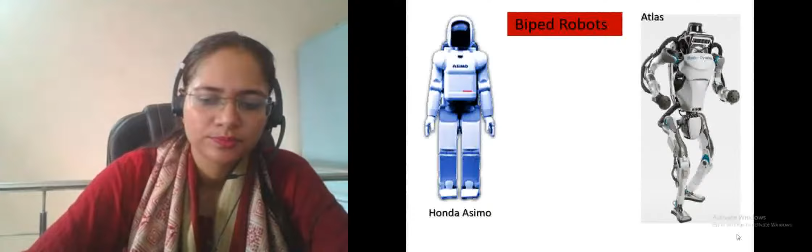These are some examples of biped robots. I think everyone is well aware of these two examples. Before going further, let me show you a video.

So there are many types of robots, but in this lecture we are going to talk about biped robots. What is the need of a biped robot? In this video, if there is any obstacle or stair in between the path of this robot, it cannot take a step over that obstacle, and it cannot go on the stairs. So biped robots are very beneficial for us.

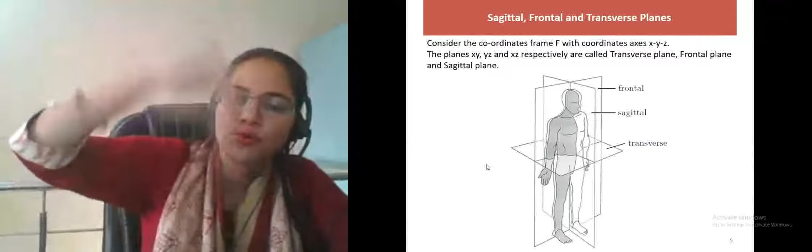If you see the front view of a body and back view of a body, that is the frontal plane. The frontal plane is the plane perpendicular to the sagittal plane, and it divides the body into front and back portions. So this is your frontal plane.

To plan the walk of a biped robot, you should know the sagittal, frontal, and transverse planes, because you have to plan the motion. If you are walking on straight ground, then there may be no need of motion in the transverse plane.

There may be no need of motion in the frontal plane for any part of your body. So if you know what the sagittal plane, frontal plane, and transverse plane are, you can easily plan the motion with fewer degrees of freedom.

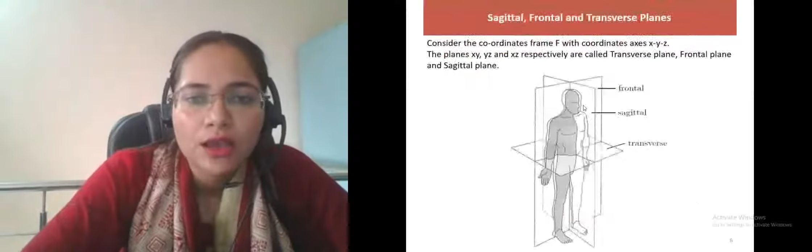The sagittal plane divides the body into left and right sections. The frontal plane divides the body into front and back portions. The plane perpendicular to both the sagittal and frontal plane is the transverse plane. So it is totally clear from this figure what is frontal plane, what is sagittal plane, and what is transverse plane.

Before discussing what is walk and what I have done during my research, let me show you one video. This is the Honda robot.

I think humans walk in a more energy efficient way. In my research, I try to follow the walk of a human with minimum degrees of freedom to achieve a good walk, with minimum energy consumption. So I'm again showing you this video. You can easily observe that this robot is walking with bent knee.

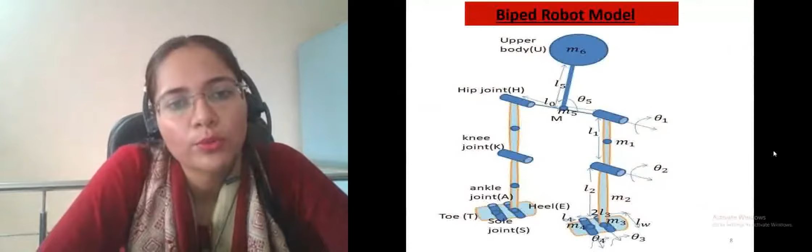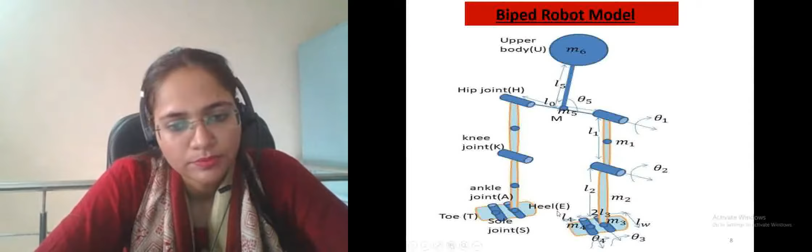This is my biped robot model. The whole mass of the upper body we consider as one upper body mass, M6. We consider less degrees of freedom to plan the walk. After planning, we can increase the degrees of freedom. There is one hip joint, knee joint, ankle joint, toe joint, sole joint, and heel. This is the plan, how we plan the motion of this biped robot model.

This blue one is the swing leg, which is moving forward, and this red one is the stable leg. When we walk, one leg is a stable leg and the second leg is the swing leg, or you can name them as you wish. One leg is fixed on the ground, which is straight, and the other leg is moving from backward to forward. Here the red leg is fixed, which we call the stable leg, and the blue leg is moving forward.

First we bend our sole, then we bend our toe. Similarly, in the stable foot, first we touch with our heel, then by sole, then by toe. Then when our stable foot is flat, we take a step further, with our swing leg heel touching the ground.

The upper body is also moving; the lower body moves in the sagittal plane and the upper body moves in the frontal plane. There should be some frontal plane motion of the upper body to achieve stable motion, because in other robots stability is not a big issue, but in human walk stability is a very big issue.

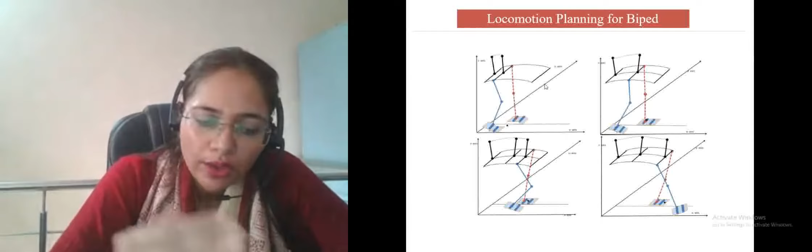That's why humans learn walking in about 1.5 years, or maybe 1 year. It takes a long time because it's difficult to achieve a stable walk, as we have to walk on two legs. There's no four legs or three legs. With four legs or three legs, there's already balance there. But with two legs, we also have to think about stability, as we can fall down.

Before discussing what I have planned and other things, let me first discuss some basic terms which are very useful for you to understand this motion. The first basic term is single support and double support phase.

At a particular instant, one or both legs can be in contact with the ground. We name the leg which is in contact with the ground as the stable leg, and the other leg which is in the air or leaving the ground as the swing leg. So the whole walking is divided into two phases: single support phase and double support phase.

I'm not talking about running. In running, there is a possibility that both legs are not on the ground. But when we are walking, one leg is always, maybe just a little bit, but always in contact with the ground. So when one leg is in contact with the ground and the second one is in the air, it is called single support phase. And when both feet are touching the ground, it is called double support phase. So if one foot is on the ground and the second one is in the air, it's single support phase.

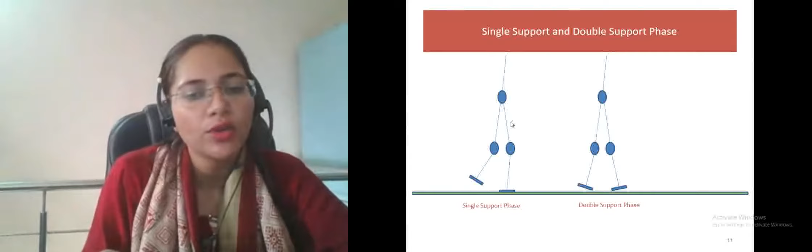If both feet are touching the ground, even if just a little bit, this is called the double support phase.

A single cycle of walking can be divided into two phases: single support phase and double support phase. Single support phase is when only one foot is in contact with the ground, and double support phase is when both feet are in contact with the ground.

So I think single support phase and double support phase is clear to all.

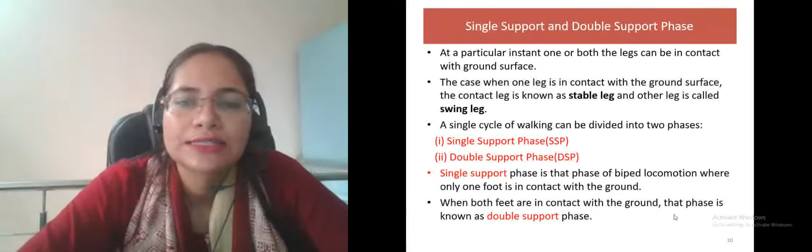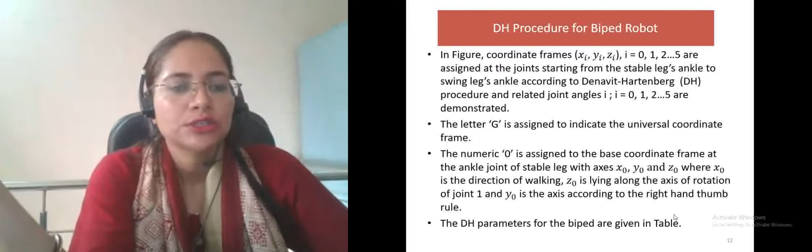Now I'm going to discuss the DH procedure for biped robots. For getting the structure of the biped robot, to plan the kinematics and dynamics, forward and inverse kinematics, you should know the DH procedure for your biped robot. You have to map frames according to DH procedure and assign the frame to find the DH parameters.

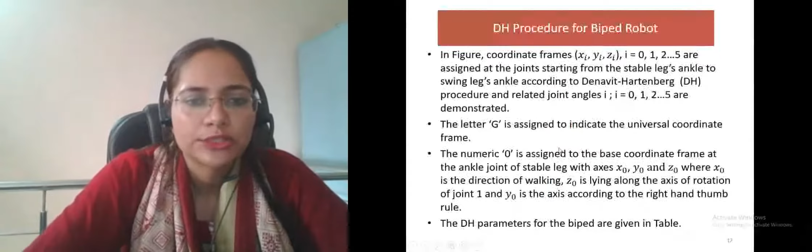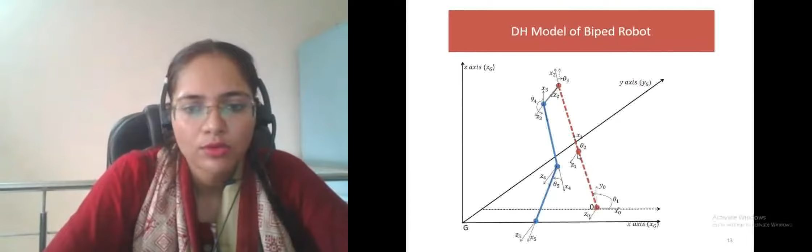In this figure, I have assigned one base frame on this zero link, a second frame on the first link, then on the second link, third, fourth, fifth. So I place the coordinate frame. According to DH procedure, we can easily calculate the joint angle, the twist angle, link length, and joint length. By using the DH procedure, I have placed these frames on the joints of my robot, and here is the DH parameters table for this robot model.

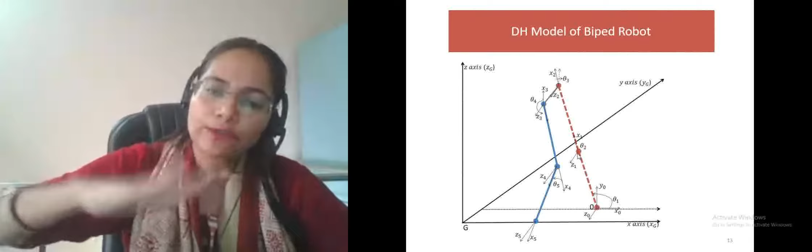In this model, I have only taken the flat footed robot, with no motion. I only consider the flat footed robot here. In further slides, I will consider the moving foot robot also, but for avoiding difficulties, first I only consider the flat footed biped robot model.

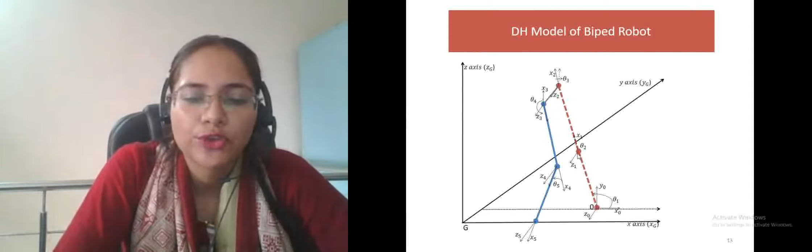After calculating these DH parameters, we can calculate the homogeneous coordinate transformation matrix using these parameters. The first link parameters are used in the homogeneous coordinate transformation matrix, and we get a matrix A0 to 1. Then we use the second link's theta 2, 0, L2, 0 coordinates, and again we get a matrix. In a similar manner, as there are 5 links, we get 5 matrices.

So all these DH parameters we got from the DH procedure, and then using these parameters in the homogeneous transformation matrix, we got these coordinate transformation matrices. Only with the help of these homogeneous coordinate transformation matrices can we calculate the kinematics and dynamics of the robot, because they are the matrix representation of a link or joint.

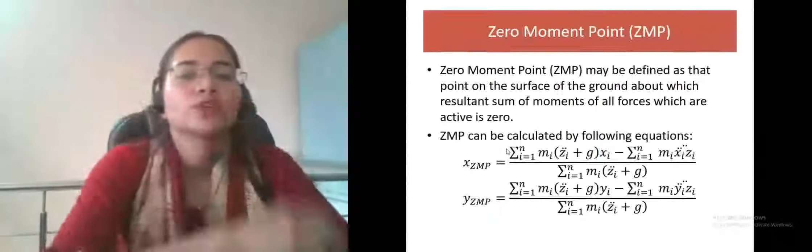So this is our second point. Now, as I already told you, in humans stability is most important. Your walk should be controlled, but first it should be stable. So from a stability point of view, I'm introducing here the zero moment point.

Zero moment point is defined as a point on the ground about which the resultant sum of moments of all active forces is zero. We calculate the zero moment point to assure the stability of the biped robot, and it can be calculated using the following equation. On the ground there are X and Y directions, like sagittal, so we can calculate XZMP using this formula and YZMP using this formula, where these represent the number of links.

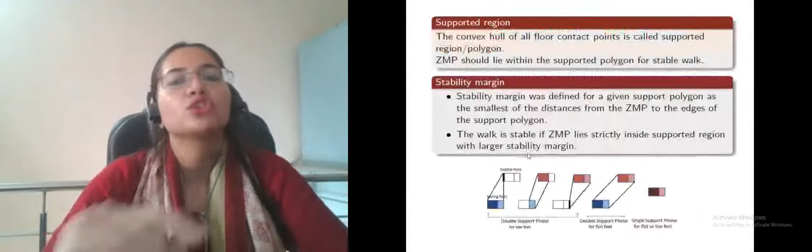So as we discussed the zero moment point, what is its use, and when can our robot be stable? We know the zero moment point is some point, but how does it relate to stability? Your robot can be stable if the zero moment point is in the supported region with maximum stability margin, then your robot can work stably.

So what is the supported region? The convex hull of all floor contact points is called the supported region or polygon, and the ZMP should lie within the supported polygon for stable operation.

What is stability margin? Stability margin was defined for a given supported polygon as the smallest of the distances from the ZMP to the edges of the supported polygon.

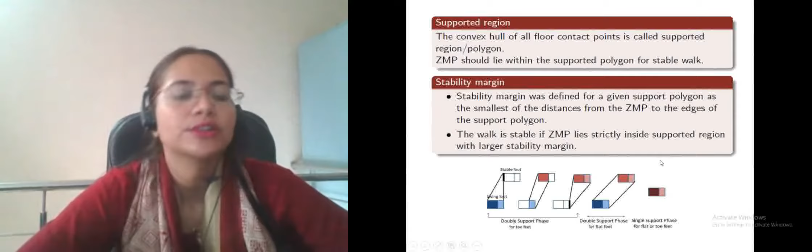The walk is stable, as I already told you, if ZMP lies strictly inside the supported region with larger stability margin. Here are two feet: stable foot is represented by the red one and swing foot by the blue one.

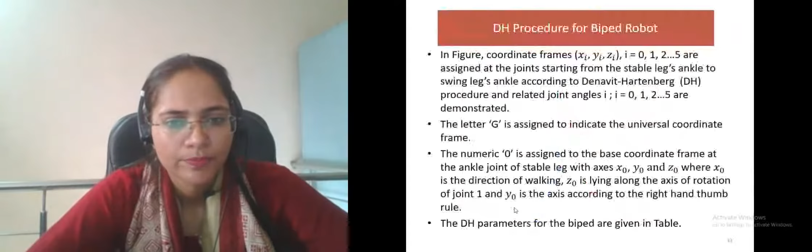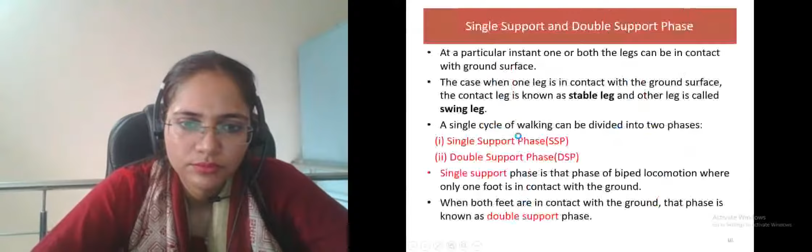So during the foot movement, initially your swing foot is totally on the ground and stable foot heel is touching. Then after time t1, your toe is on the ground and sole is above the ground, while in stable foot the sole is touching the ground and toe is above the ground. You can say it is like this.

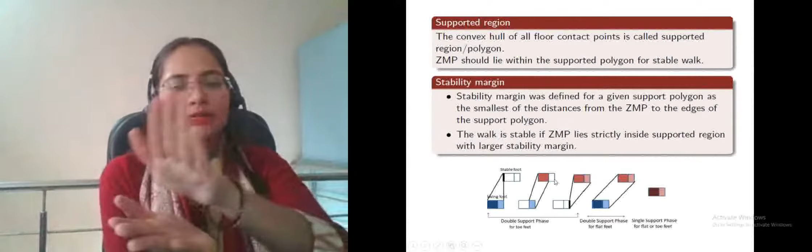You can see from this figure right here, moving, then the whole foot is in the air. So for this we have the stability margin, supported region, during double support phase at time t0, at time t1, and at time t2.

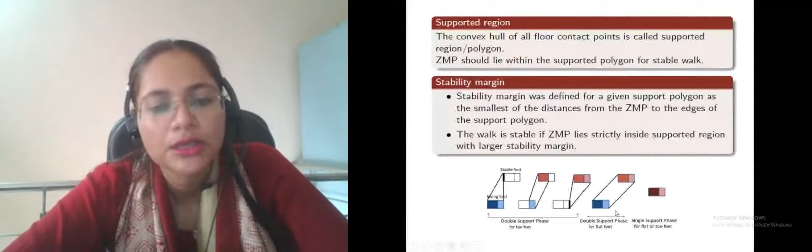For a flat-footed robot, this is the only double support phase, and this is the only supported region. This one is for a toe-footed robot. During single support phase, your stable foot is the only supported region.

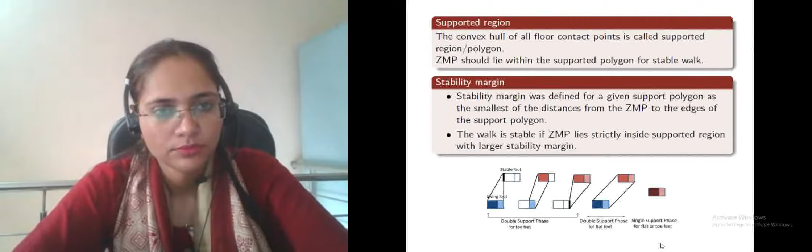Your ZMP trajectory also depends on your foot. If you have a flat-footed robot, there's a different kind of ZMP trajectory, and if you have a toe-footed robot, there's a different kind of ZMP trajectory. I will discuss this further.

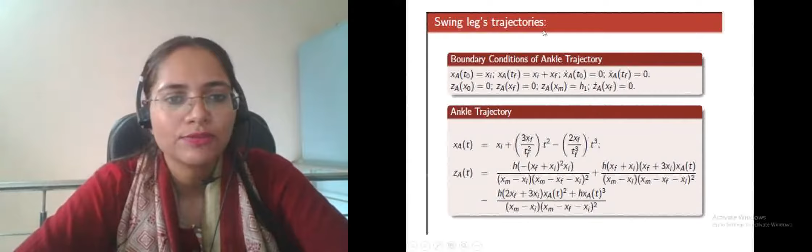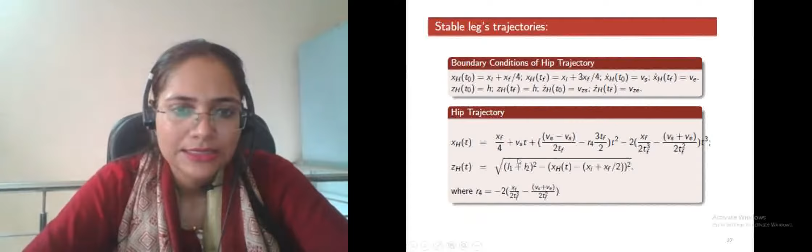So for flat-footed robots, the swing leg trajectory for these given boundary conditions is this, and the stable leg's trajectory for these conditions is this. The hip follows a circular path from here to here.

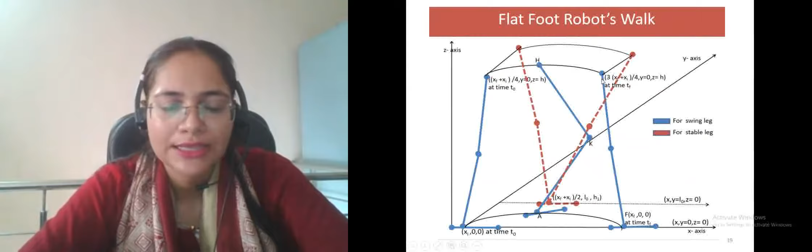Both hips follow the same trajectory because we are moving on a flat surface. But if you are moving on stairs or on some uneven surface, then it is not necessary that both hips follow the same trajectory.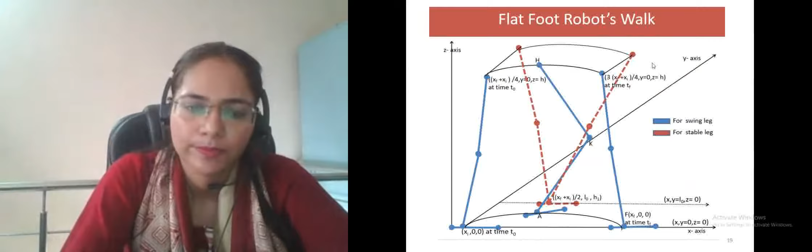So next, after calculating these trajectories, we have to calculate forward kinematics and inverse kinematics. So what is forward kinematic?

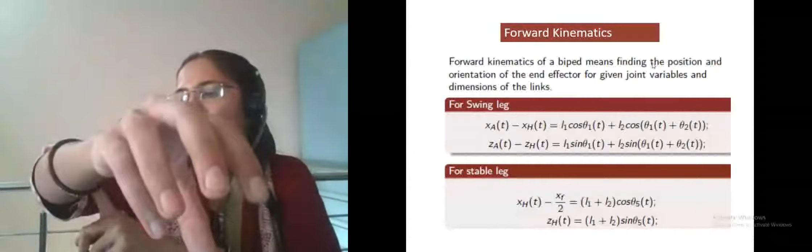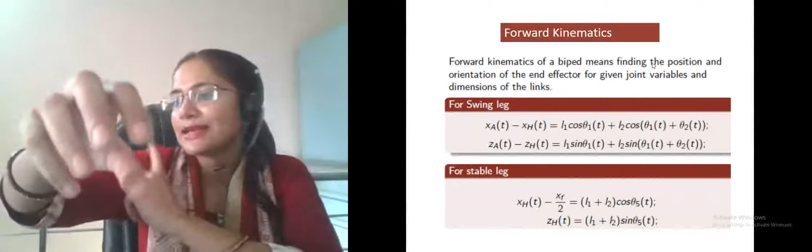If you want to assess a position, there are two types of cases. First, if you want to assess this position, you have to give one angle here and one angle here, then you can assess this position in a two-link manipulator. If you have this angle and this angle, according to this angle you can assess one position.

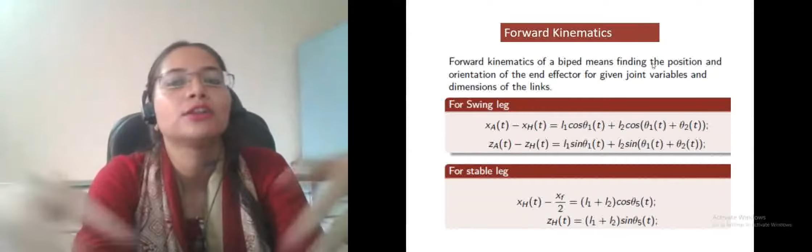If you have the position and have to find the joint angles, that is inverse kinematic. If you have the joint variables and dimensions of the links and want to find the position and orientation of the end effector, that is forward kinematic. This is the forward kinematic for my robot, and for inverse kinematic, I used an artificial neural network.

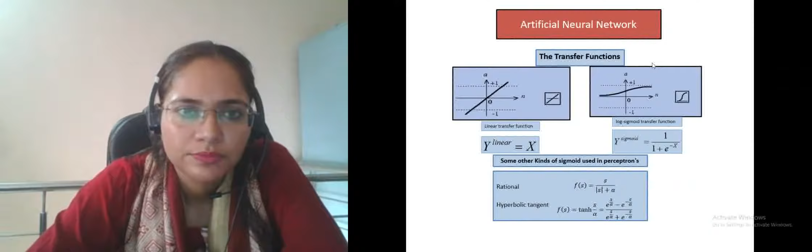In artificial neural network, there are many transfer functions available. I use the sigmoid function. I have calculated the inverse kinematics using neural network. I give the end effector position, apply some weights, and after that I get the joint angles.

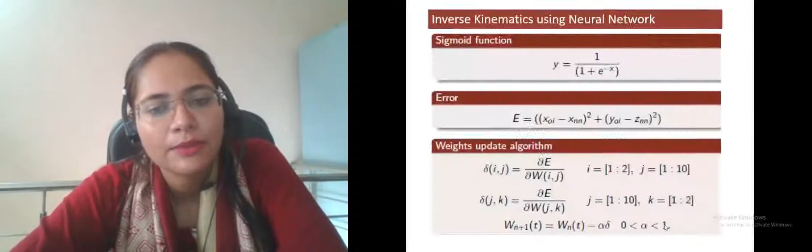This is forward kinematics, inverse kinematics. After calculating them, I have to plan the motion of the upper body, or you can say trunk, because trunk plays an important role in ZMP stability. How your upper body is moving plays an important role in your ZMP stability.

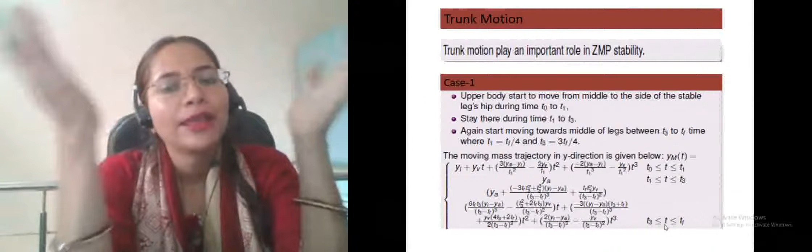As you can see, when a person is walking on a rope, there are some tricks they use with the upper body. They hold something in their hand, and according to their upper body movement, they balance their walk on the rope. You can see this in movies, or maybe it can be real in real life also.

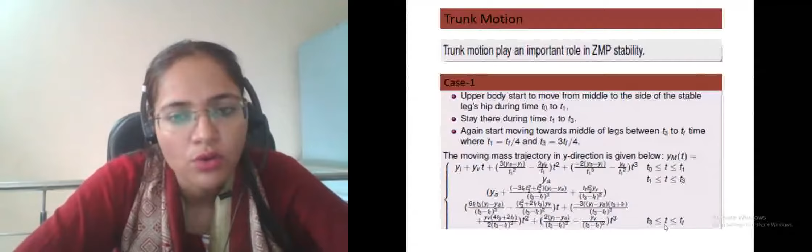So upper body plays an important role in ZMP stability. I have planned and tried so many ways. I have observed so many walks of humans. I observed my own walk so many times, up to 6 months, observing how I am walking and how other people are walking. It was very awkward for me to observe others, but I had to observe them.

After observing all these things, the upper body starts to move from middle to the side of the stable leg hip during time T0 to T1. This is for a flat-footed robot.

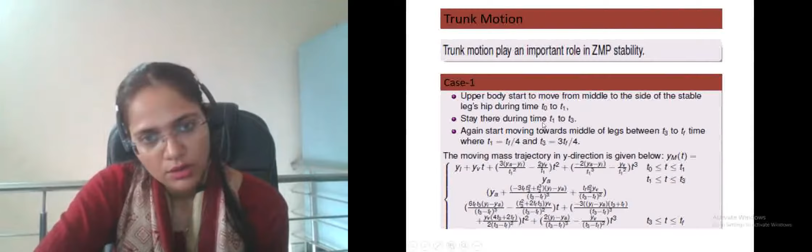If your foot movement is changed, your upper body trajectory will be changed. The upper body starts to move from middle to the side of the stable leg hip during time T0 to T1, stays there for half the time, and again returns back in 1/4 time.

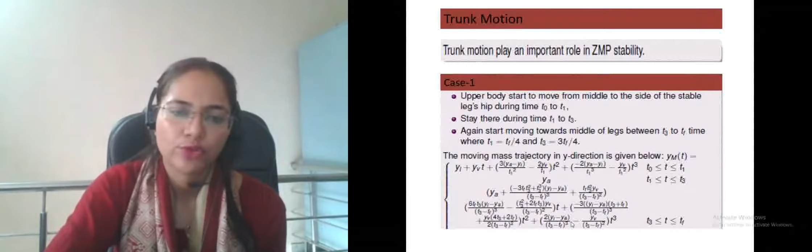I have planned here 3 cases to observe which one is better for my flat-footed robot. This is the first case. In the second case...

My robot starts to move from T0 in 1/8 of the whole time, from middle to hip of the stable leg, stays there for less time, and again returns back in 1/8 time.

In case third, the upper body starts to move from middle position to the stable leg from T0 to T2 time and returns back to initial condition. It is not stopping there. It goes in T0 to T2 time and again returns back in half time.

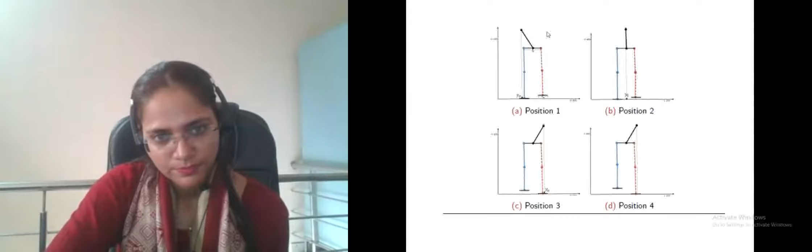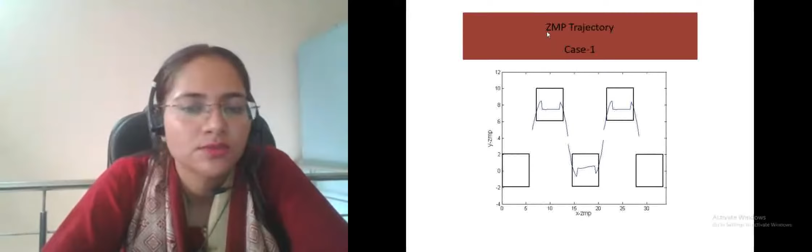As you can easily see, the most stable trajectory I got is in the third case, for the flat-footed robot, where the robot starts to move from T0 to T2 time, from middle to stable foot, and again returns back in half time. There is no stoppage on the stable leg foot.

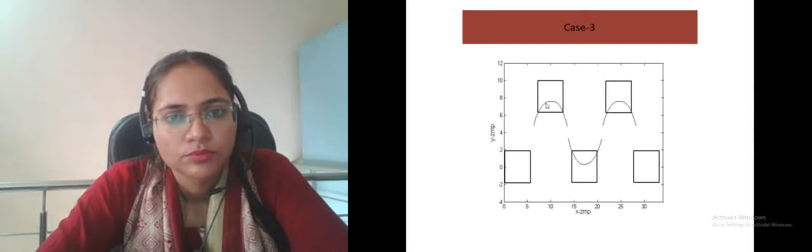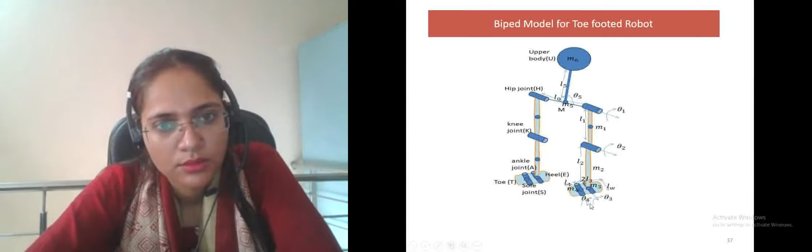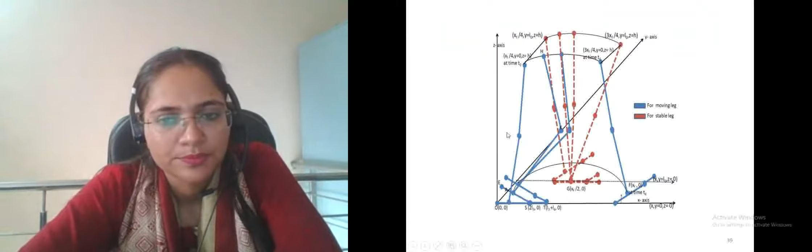So these are my parameters. This is the structure of robot legs in the sagittal plane. The red one is the stable leg, and the blue one is the swing leg, or you can say moving leg.

This one is the swing foot planning and stable foot planning during DSP and SSP. During DSP, meaning double support phase, the swing foot starts to move like this. In T0 to T1 time, it moves from here to here. Here only the sole is moving, here sole plus toe both are moving. Then it leaves the ground, all links follow some trajectory, and then again the heel touches while the toe is leaving, and here the heel is touching the ground of the swing foot.

For the stable foot, I took this position as the initial condition. The stable foot is in this condition, then it starts to move toward the ground. So first the sole touches the ground and then the toe. If you observe your own walk, you find a similar pattern.

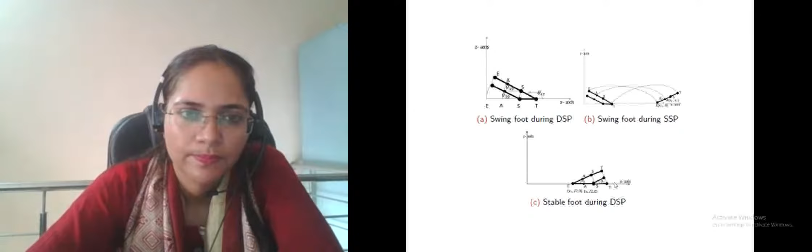This one is my ankle trajectory during DSP, and this one is the ankle trajectory during SSP. I have used cubic polynomial for planning these.

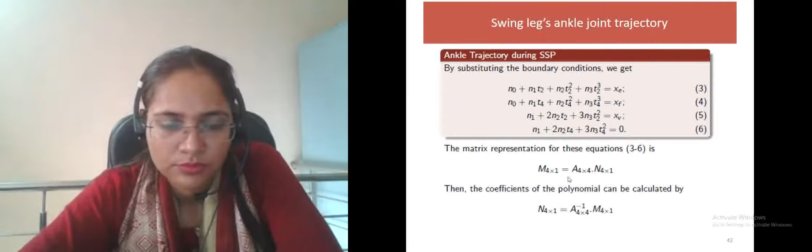This one is for the swing leg. Now I also have to plan for the stable leg, and for the stable leg there are sole trajectory, toe trajectory, and hip trajectory. So these are my trajectories.

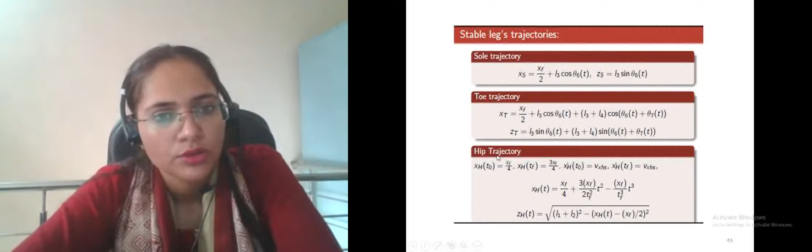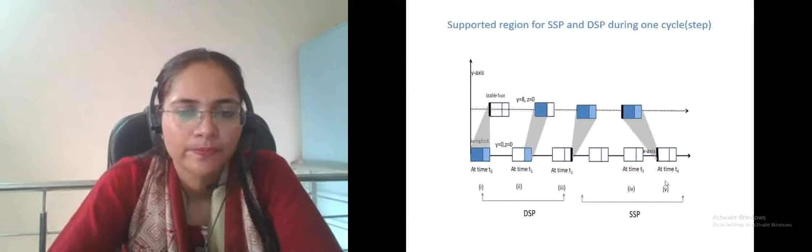As I already told you, the upper body motion we have to decide according to foot movement. So again I have considered three types of cases after observing so many walks. There are three cases here: case one, case two, and case three.

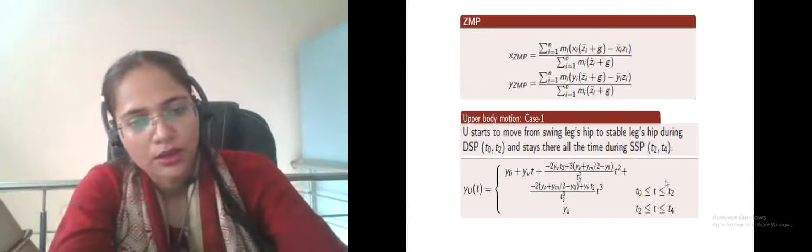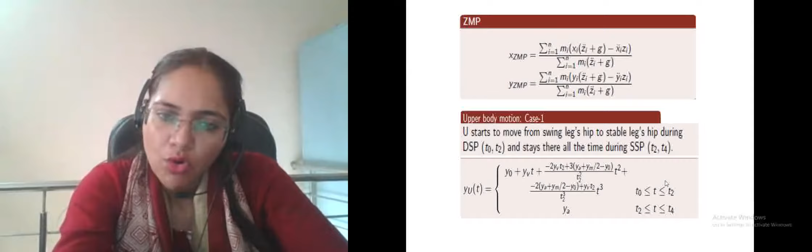In case one, the upper body starts to move from the swing leg hip. I'm not moving from the middle position. I'm moving from the swing leg hip to the stable leg hip during T0 to T2 time, and it stays there all the time during SSP, up to T4 time.

Second case: the upper body starts to move from the middle to the side of the stable leg hip during time T0 to T1, stays there from T1 to T3, and again returns back in a quarter of the time.

Third case: the upper body starts from the middle position toward the stable leg hip in half time, and returns back to the middle position in the rest of the half time.

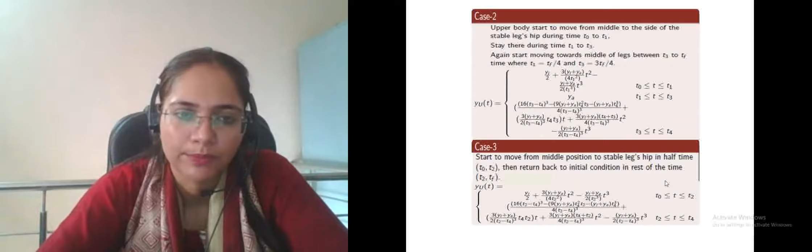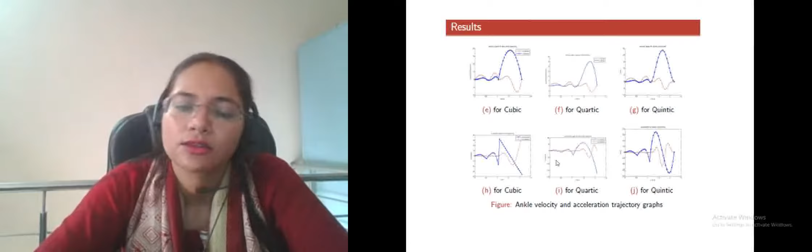So I have planned these trajectories using cubic polynomial, quartic polynomial, and quintic polynomial, because if there is some discontinuity in velocity and acceleration, it creates problems in stability. There should be no jerk or sharpness in your trajectory. If there is something like this, your robot will not be stable.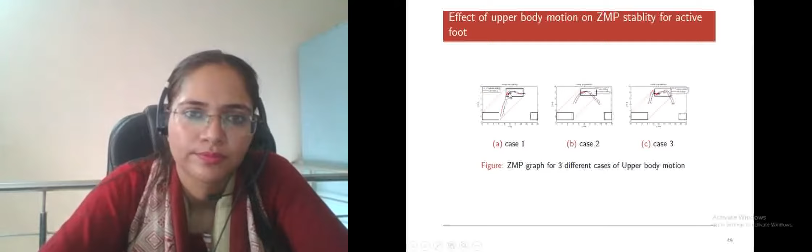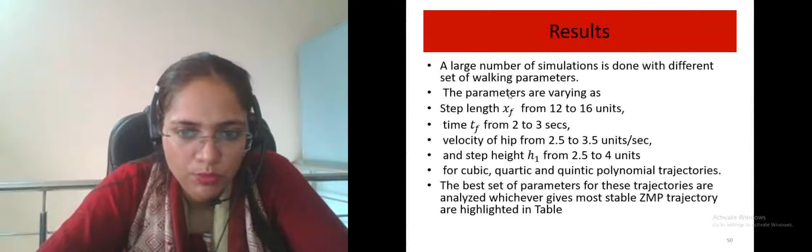So I have done a large number of simulations using different parameters, varying the step length among these parameters: step time, velocity, step height, and also I used three types of polynomial trajectories, and then I got this table.

For the upper body, I have considered three cases. In the first case of upper body trajectory, I have planned with three types of polynomials. Maximum step time is 3, and it is out of the stability region for the last 4 time instants. In case three it is totally unstable, and in case one it is stable.

You can see in case of cubic polynomial, at time 2.1 step time, it is unstable. And this is your hip velocity.

Now at 1.8 seconds it is unstable for quintic polynomial, but for 2 seconds it is stable. So this is my final result: it is stable for 2 seconds, so it can take a step in 2 seconds.

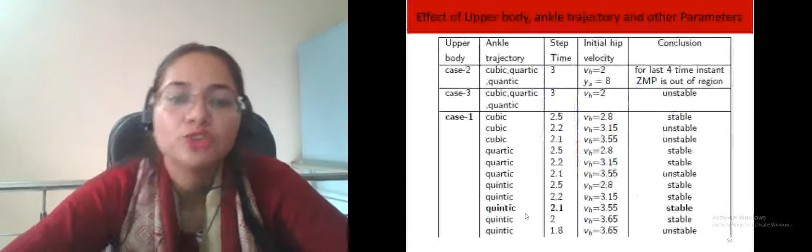What does step time mean? Step time means the time taken to take a step from initial condition to final condition, when we are taking a step backward to forward—whatever time is taken, that is called step time. And the length it covers is called step length.

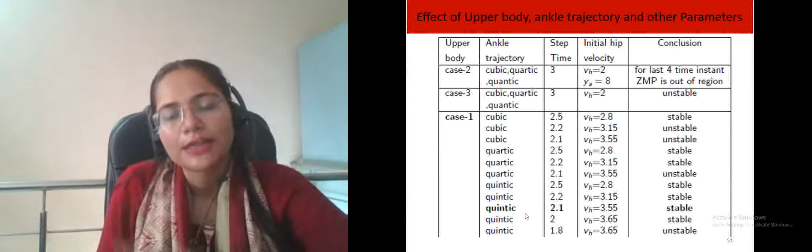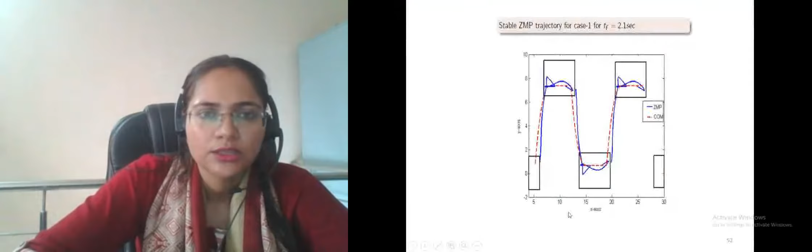So here is the minimum time for quintic polynomial, that is 2.1 seconds. This one is stable ZMP trajectory for case 1 for time 2.1 seconds.

After doing all these things, I also tried to walk this robot on irregular surface and also to cross some obstacle.

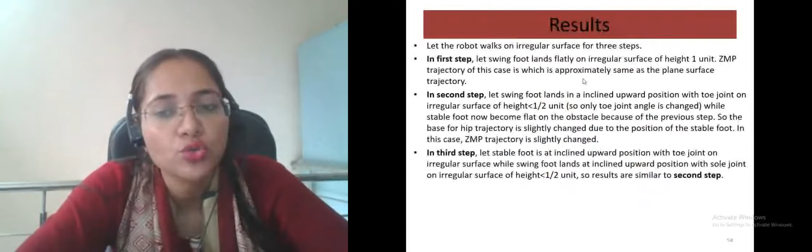This one is irregular surface, but it can walk on more irregular surface. You have to do some modification in hip trajectory, because if you are moving on more unstable or irregular surface, there should be a movement in frontal plane of your hip.

So you have to plan the trajectory not just in sagittal plane, but also in frontal plane, so you have to plan the hip trajectory in a more difficult way. But in this robot, I only planned the hip trajectory in sagittal plane, and it can also cross these types of 1 unit and half unit obstacles.

This is the walk of the robot on irregular surface, and it can also cross an obstacle of 3.5 unit width and 5.5 unit height in one step of 16 units and step height 9 units within 4 seconds.

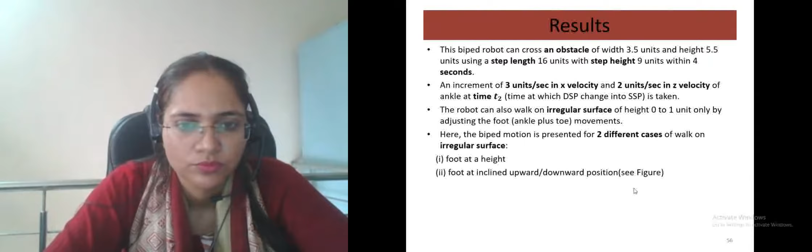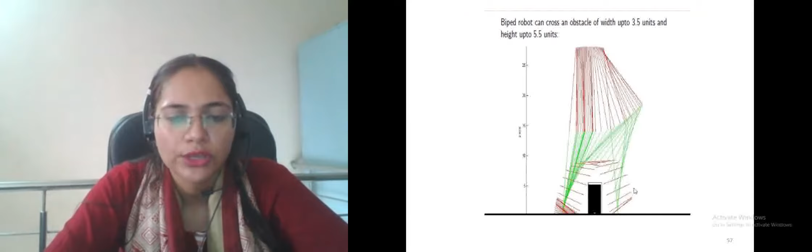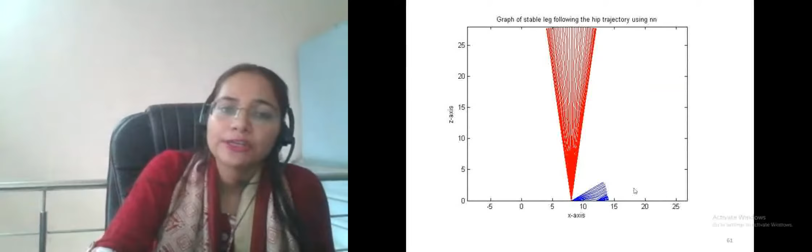After planning all these things, I understood that trajectory plays the most important role for biped robot walking. So again, I tried FNN, and I am also nowadays trying WNN. I have tried FNN, feed forward neural network, and wavelet neural network for trajectory planning of the biped robot.

So I have no need to use cubic polynomial or some other polynomial for planning the trajectory. I'm only giving the initial condition, and I will get the output as a trajectory using FNN, because FNN can work as a universal approximator.

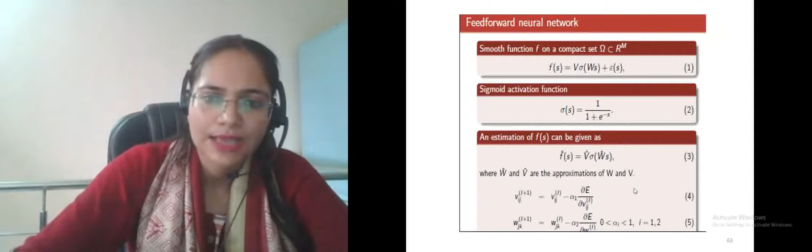So here I use feed forward neural network as a trajectory. FNN model is used for 4 constraints and for 6 constraints.

Here N1, N2, N1, N2, N3 are neural networks which are trained using boundary conditions and some error function. After training them, I put the final network here, and it is working as a trajectory for my robot.

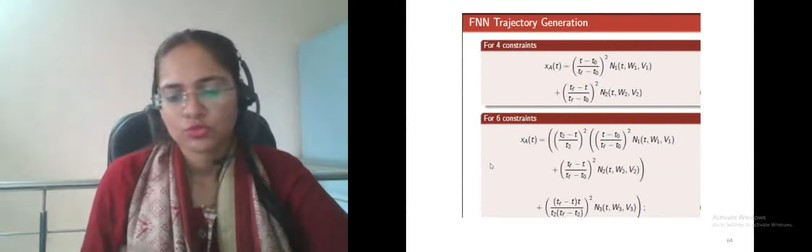So this is unpublished work. I'm working on it. I have planned dynamics for this robot and so many other things I'm also working on nowadays. So, thank you.

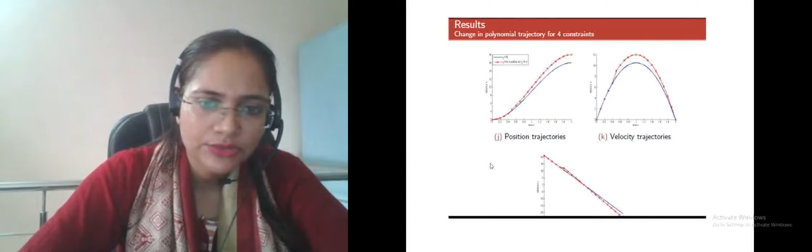You can see this blue one is trajectory using neural network, and this red one is using polynomials. So for 4 constraints, FNN is providing a better result.